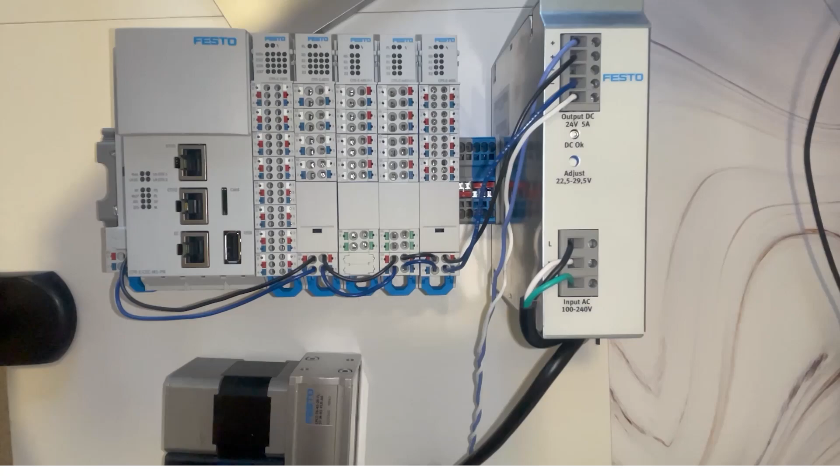What I have here is the PLC connected to the power supply. Over here I have my SMS. Down at the bottom of my SMS, I have a cable connected to the logic. So I'm going to get the other end of this cable, which looks like this. What I'm going to want to do is disconnect this cap so that I can individually wire all of those connections to the PLC. First, before we get started, please make sure that you don't have anything connected to power.

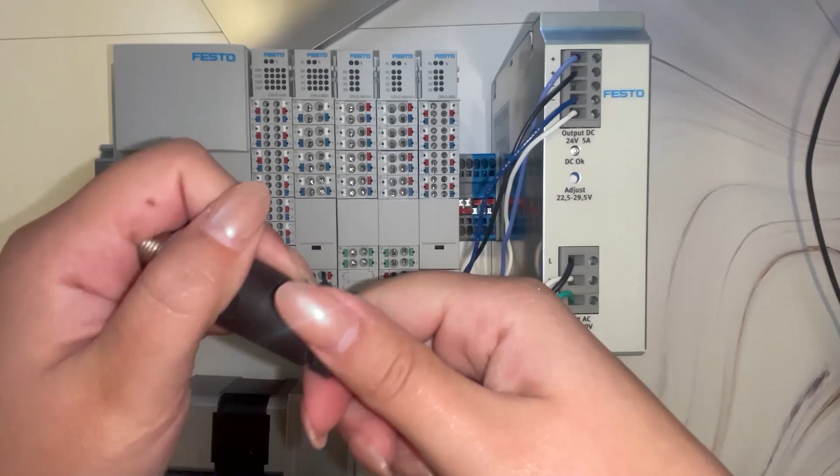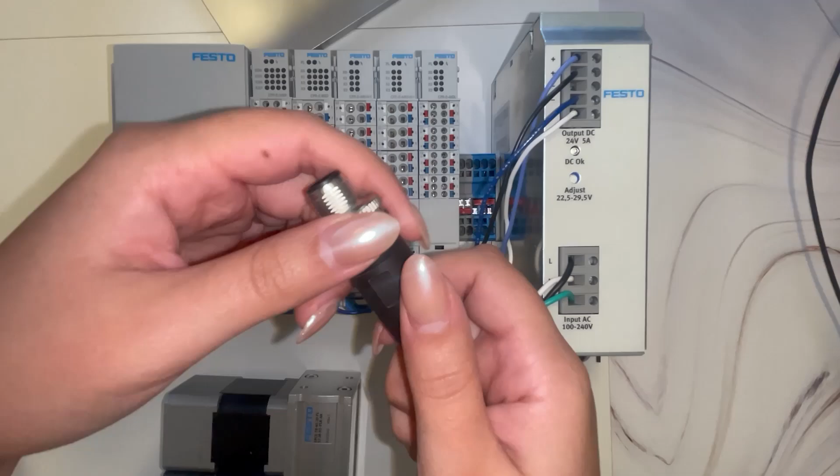So first we're going to unscrew the bottom part of this cap. You can hold the top, the body, and you just have to unscrew here. From there, you're going to want to unscrew this black top. So you can hold the body part and you can unscrew the top. And you should get something like this. So down here at the bottom, I have all of my cabling.

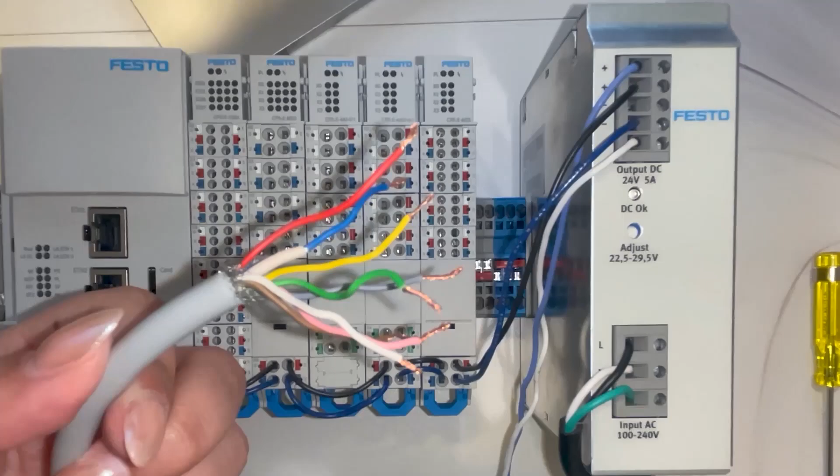What I'm going to do with that is I'm going to take my screwdriver and I'm going to unscrew all of these screws around the cap. Now I have something that looks like this. What I did was I took some pliers and I exposed the wires a little bit. That way it would be easier to connect to the PLC. So now let's go ahead and look at the pinout of all of these cables so that we can know where to connect them on the PLC.

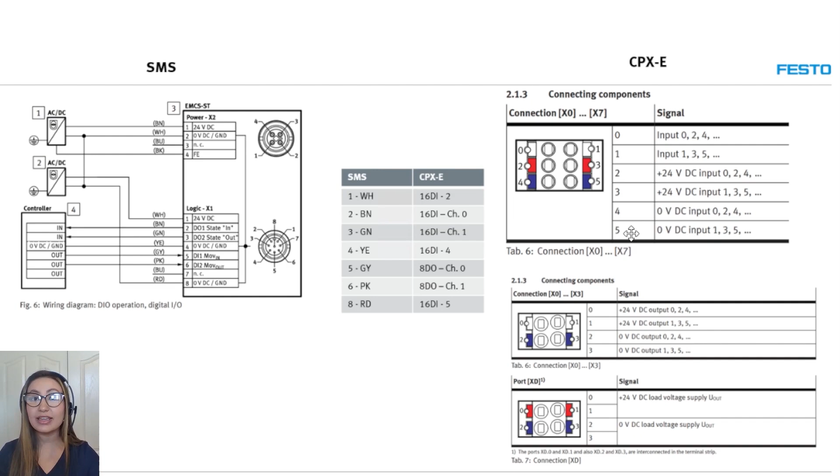Blue says that it's not going to be connected, so we'll leave it there. And the red is going to be connected to 0 volts or ground. We had yellow already connected to 4, so we're going to connect red to the 16 digital input slot pin 5. So now let's see how that looks on the hardware of the PLC. Now we're back to the hardware PLC. Over here you can see those 16 digital inputs I was talking about and the 8 digital outputs.

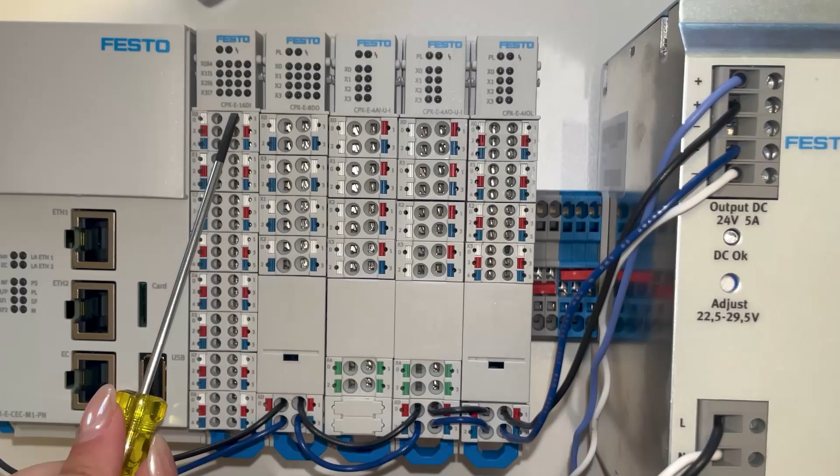So let's connect the wires according to their pinout, starting with the white wire. We said the white wire is connected to 16 digital input pin 2, so let's connect it. One trick I like to do is go ahead and twist the wires so it's easier to insert into the pin. Now you're going to take a small screwdriver like this. You're going to go to the pin you would like to insert and you're going to press down.

So I'm going to press down on the red in that slot and I'm going to go ahead and connect the white wire all the way as much as I can, and I'm going to let go of the screwdriver slot. From there, I shouldn't be able to move the wire. Now I'm going to connect all the rest of these wires and I'll check back in once I'm done. Alright, now all my pins are connected, so I'm going to go ahead and power it on.

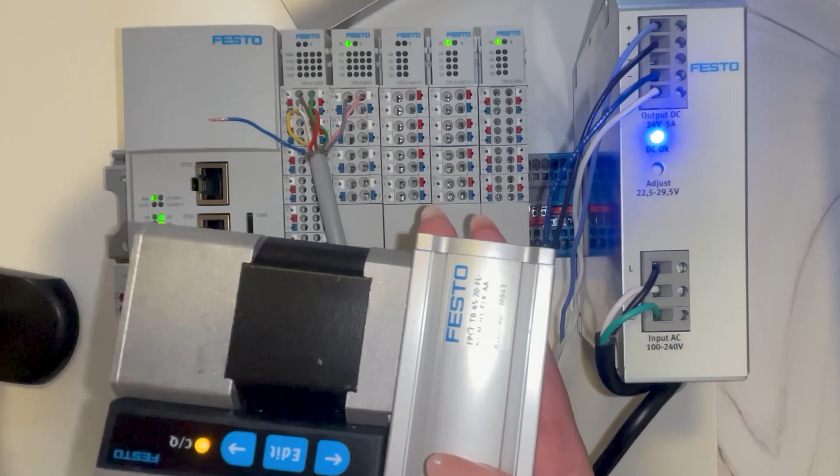We can see an LED is turning on, saying power is on. Now let's give it a couple of moments. Over on the SMS side, you're going to be able to see a yellow LED appear. That's not a bad sign. That means that it's receiving some power. The reason it's yellow is because the actuator has not been referenced yet. So in order to change it to a green color, we need to move it in and out and go ahead and have a set reference point. But we're going to do that with the software.

So now that everything's powered on, I'm going to go ahead and connect it to my desktop laptop. So I'm going to use an Ethernet cable. I'm going to connect one side to the PLC, and I'll connect the other side to my laptop.

Just a quick side note here, we have the logic power now connected to the PLC through the wires that we just connected. The other cable here is the load power, which is an M12 connector. That is these 2 wires that are connected to the positive and negative terminals of the power supply. The PLC is also connected to the power supply through these two black and dark blue wires. So what I'm going to do is go ahead and get the connection to this power supply. I'll get the other end, plug it in so that I can provide power to this entire system.

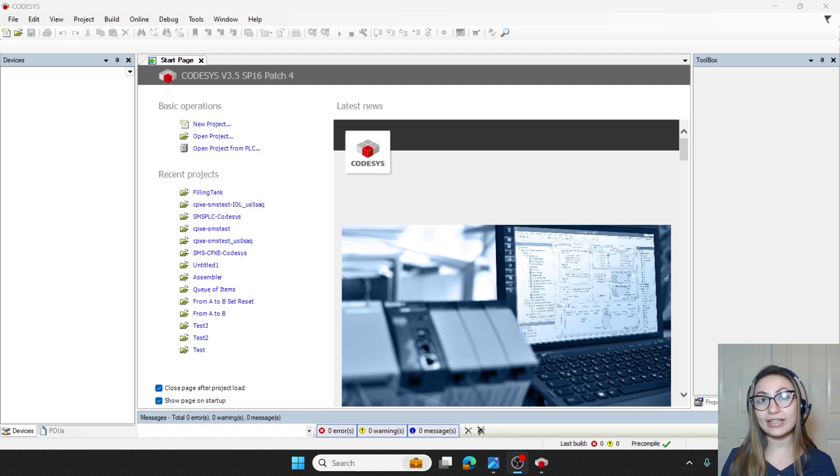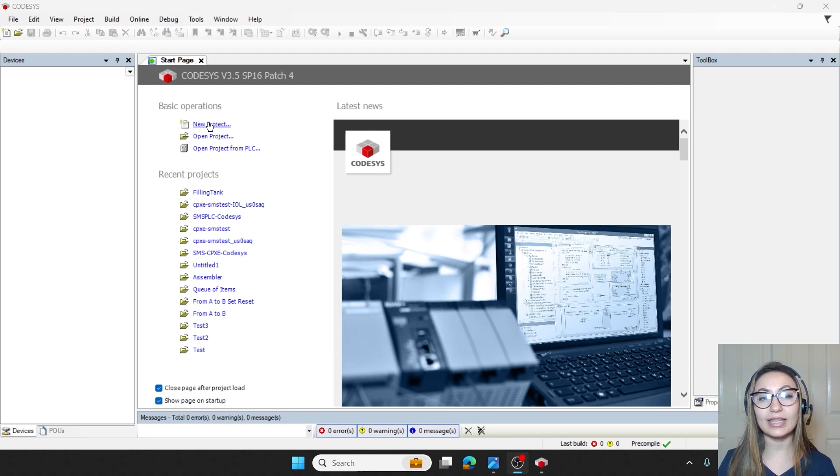Now that we've gone through all the connections on the hardware, I'm going to go ahead and demonstrate how to connect the PLC directly to CODESYS, and then we'll run through a code that will allow us to control the movements of the actuator. So let's get started. Now that I have everything connected to the power, I have CODESYS opened here, and I'm going to go ahead and create a new project. I'll go ahead and name this CODESYS PLS SMS, and I'll have the template be my PLC.

From there, I'm going to go ahead and click on the version of my device, which is 3.5.12, and I'm going to be coding in ladder logic. So we'll give that a minute to open. Now that that's opened, we can see over here on the left side a menu option. So we're going to go ahead and double click on device. I'm going to scan the network so that it can see if it finds our PLC. Click on that and press OK. Okay, so it found it.

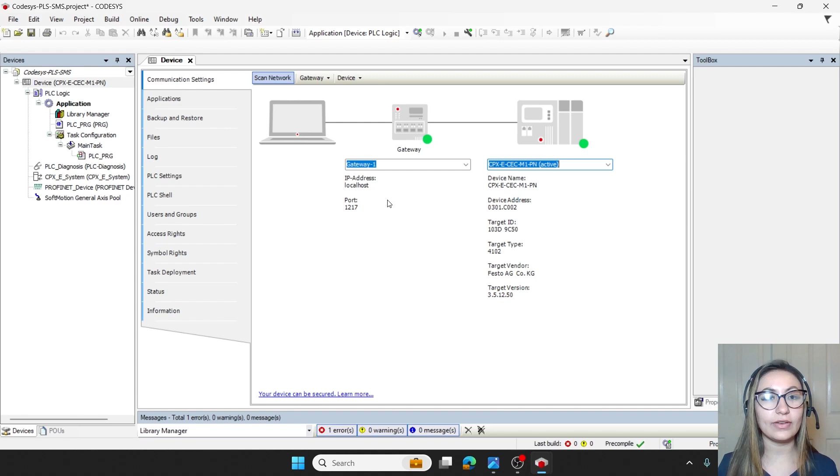Now we're going to go over here to our CPXE system. Under actual configuration, we're going to scan. That way it can upload the actual configuration of our PLC, and we'll apply that to CODESYS. Okay, now going back to device up here on this tab, I'm going to go to PLC settings and I'm going to change this option to enabled 2. That way it can always update our variables. Click on yes.

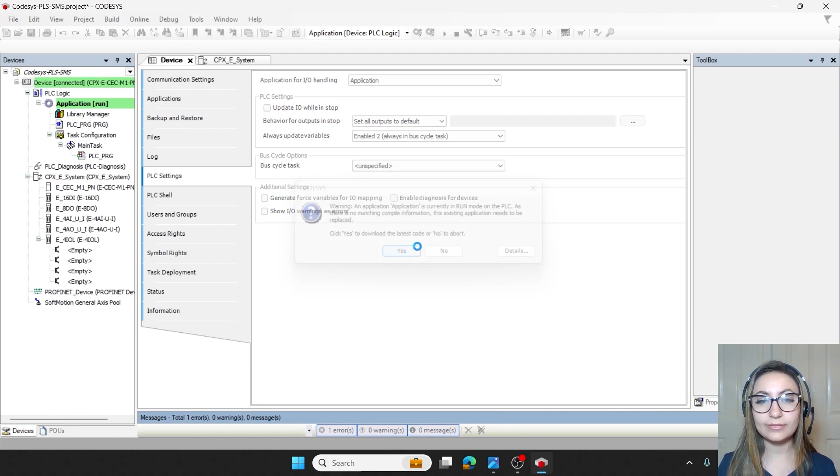Okay, now I'm going to log in to make sure that everything was connected. Once I hit run, we see green symbols over here, so we're good. Now I'm going to log back out and I'm going to go ahead and open our PLC program.

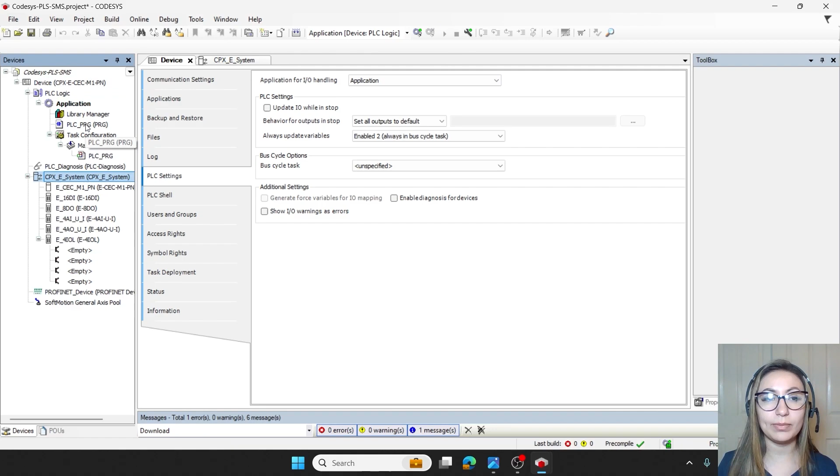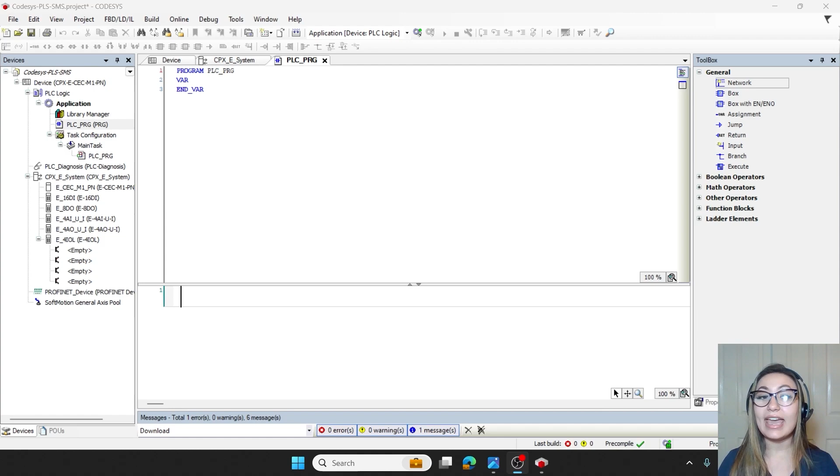Before we get started, I want to go ahead and lay out what I want the actuator to do. So I want the actuator to start at the state in position, and then it's going to shoot all the way out. So once the piston rod stretches all the way out and is at that state out position, I want to hold it there for 5 seconds. After those 5 seconds are done, I want it to go back to its state in position, and that will complete one cycle. I want this to happen 3 times, so 3 cycles. So I'm going to go ahead and get started on the code, and then I'll be back to explain where I got all the variables from, as well as the process of my code.

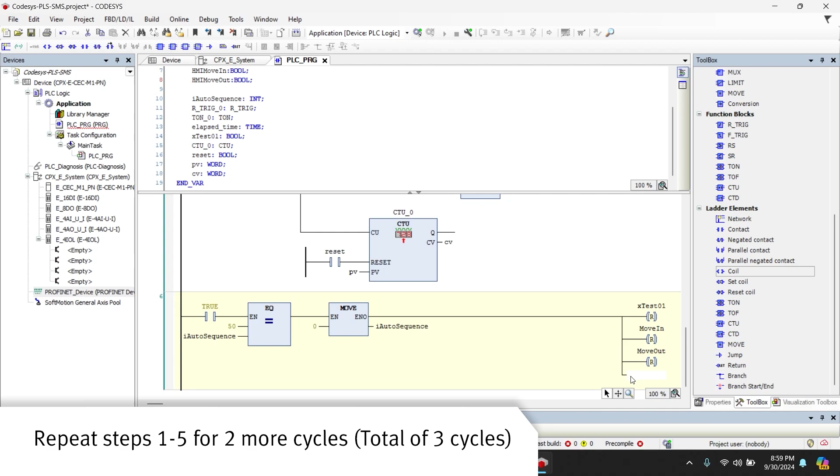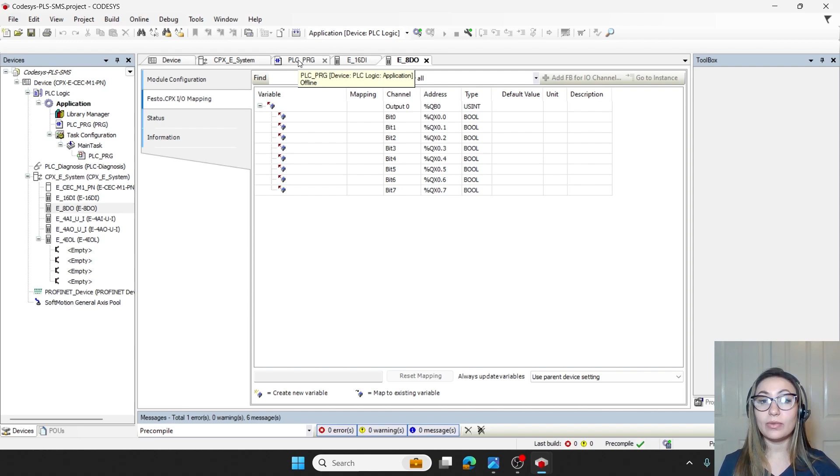Let's go ahead and take a look at the code now that it's complete, starting with the variables. I'd like to describe where I got the addresses from. If we look on the left corner and we click on 16 digital input and 8 digital output options, and we locate the IO mapping, we're going to see the addresses for all of the inputs as well as the outputs. This should be familiar based on the wiring configuration that we did earlier. So that's where I got all of my addresses for the inputs and outputs here.

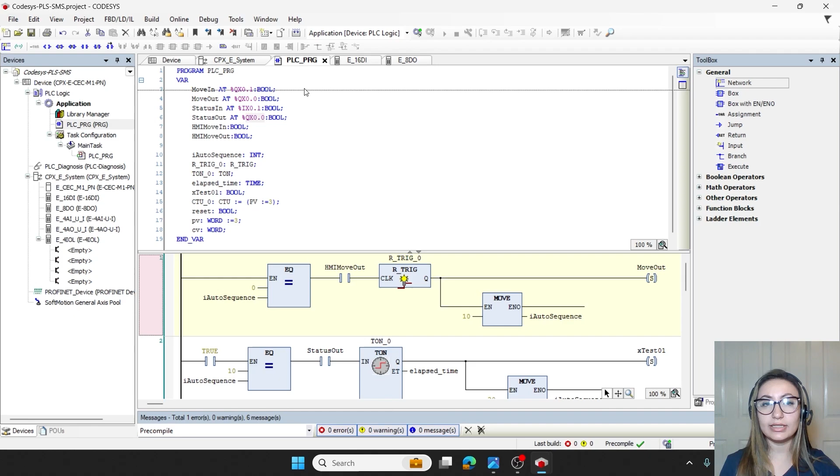Now the HMI move in and HMI move out, those are Boolean signals that I created so that the code can receive a signal to complete a particular process. And you'll be able to see that once I explain the ladder logic code. The rest of this here is also going to be explained with the ladder logic. So let's get into here.

Before I go into the details, I would like to explain these two functions here, equal and move functions. Basically what I did here is I created, you can think of it as steps. So this would be step 0. And once I complete this entire set of code, it's going to end at step 10. Now, rung 2 is not going to start until step 10 is complete, and so on and so forth. So I'm basically saying go through this entire rung before starting on to the next one.

So starting at the top, I'm going to set HMI move out to true, and it's going to immediately move the actuator out. Now, once that's done, it's going to make sure that status out is true, meaning that it's not in the process of being out, but it's actually fully stretched out, and then it's going to hold there for 5 seconds.

Once that's done, I created a control variable here called xTest01. Once it's reached those 5 seconds, it's going to move back in, and I'm going to reset the move out position. That way, in the following cycles, it can be reset already. So again, once status in is true, it's going to reset that control variable, reset move in, and it's going to move out.

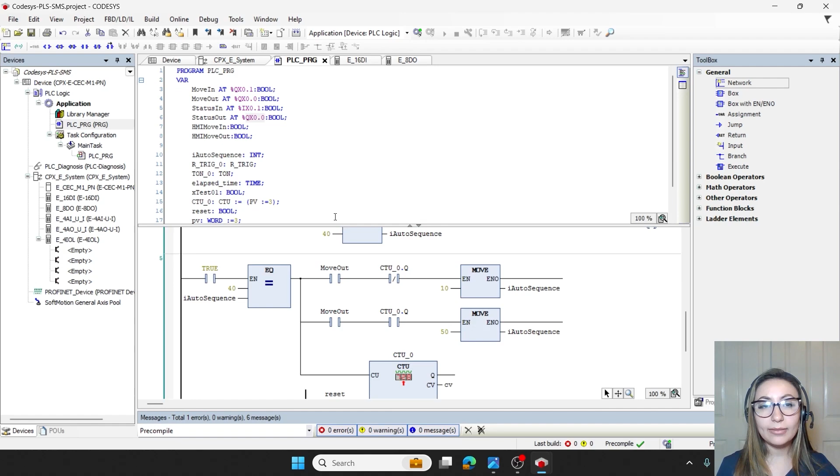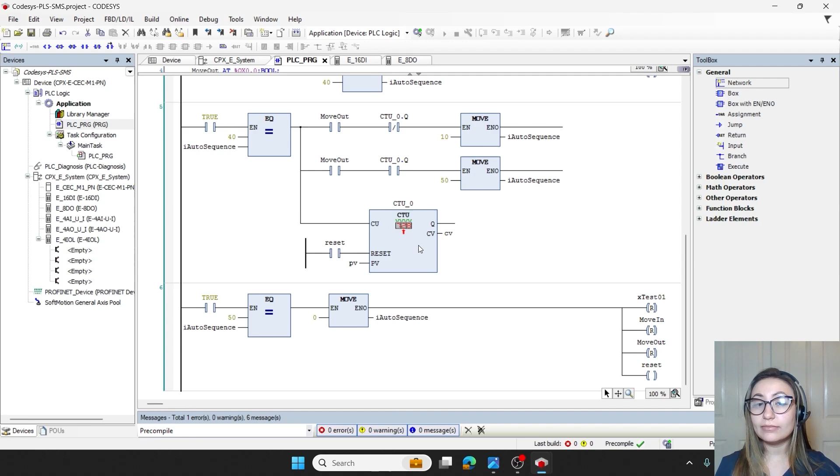And that cycle, I want it to complete 3 cycles. So here what I did is I implemented a counter. Going back up here to the top, I set the preset value to 3, meaning those 3 cycles. So if the current value is anything less than 3, it's going to go back to step 10. However, if the current value has reached the number 3, then it's going to go over here to step 50.

So if it has to go back to step 10, it's going to complete all of this process again, and it's going to check if the counter has reached the current value of 3. If it has, it's going to come down here to rung 6, and it's going to reset everything, and we're basically saying that the process is complete. So now that we have everything, let's go ahead and log in.

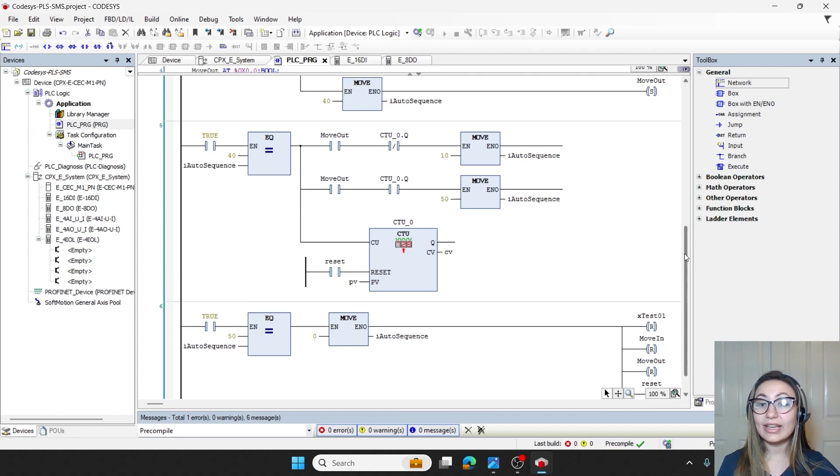Now that we're online, we're able to see the values of each of the expressions. Before going through the process, we do want to set that reference point on the CQ LED of the SMS. So basically, we want to change the LED from yellow to green. We're going to hit run, and we're going to set our HMI move out to true. That way, the piston rod can move out and set that reference point. So once I click true, I'm going to press Control F7 on my keyboard. And now my LED has turned green.

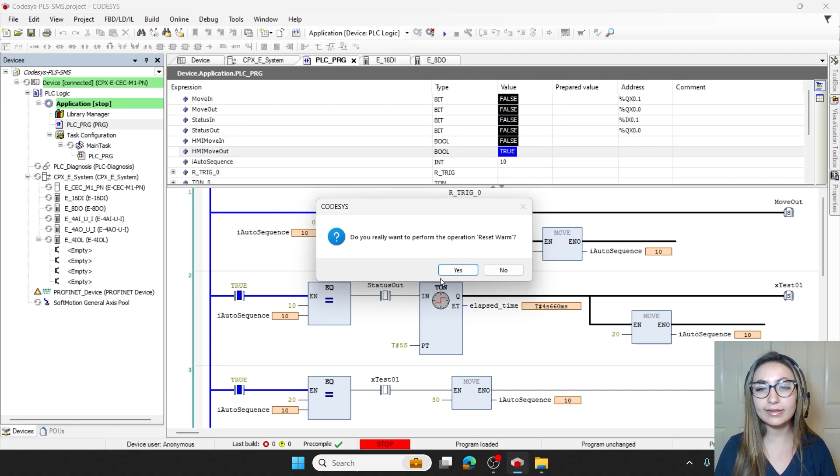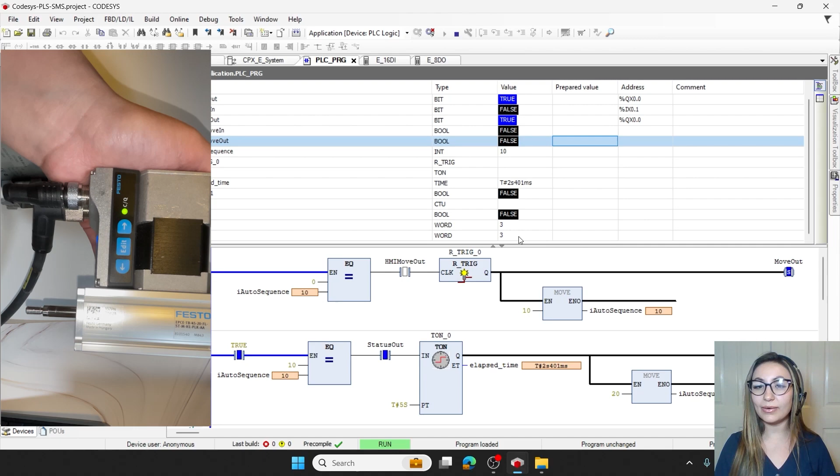So I'm going to do a warm reset. That way I can show you the timer as well as the current value increasing as the cycles increase. So I'm going to run it again, and I'm going to set my HMI move out to true. And now we can see the timer running. Just completed 1 cycle. Now it's completed its 2nd cycle. After this 3rd cycle, it's going to stop. And stop. So now we see that the status in is true.